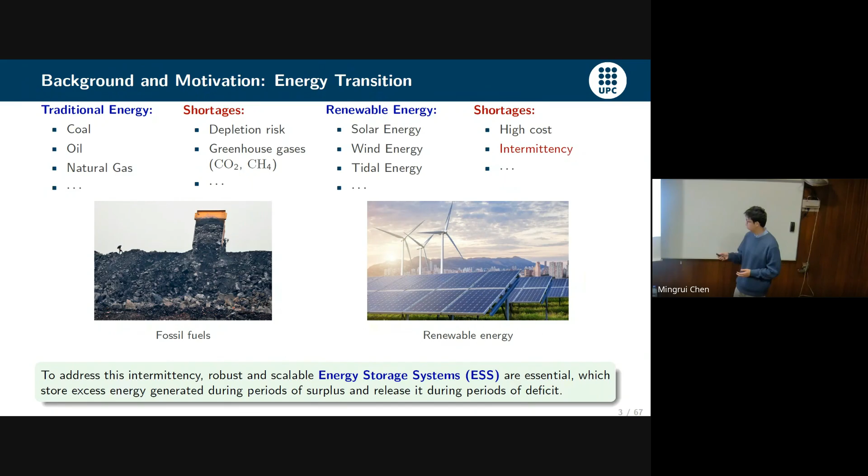Let's begin with background and motivation. The global energy is undergoing a major transition from traditional energy to renewable energy. However, one of the shortages of renewable energy is intermittency. For example, solar energy depends on sunlight, which is highly variable and cannot be controlled. To address the intermittency, we need robust and scalable energy storage systems. Among various energy storage technologies, hydrogen storage is emerging as a promising alternative due to its high energy density.

In general, hydrogen can be stored in three ways: compressed gas, liquid hydrogen, and solid state storage. Both compressed gas and liquid hydrogen have energy losses. So in my work, I mainly focus on solid state storage, which provides high hydrogen density at moderate temperature and pressure, and provides large capacity storage.

This is a schematic of a metal hydride tank, or we call it MH tank. In the charging process, the hydrogen enters the tank from the inlet and then reacts with metal alloy to form metal hydride and release heat.

To quantitatively describe the reaction, we always use the pressure-composition-temperature curve, or PCT curve. This curve is very important, showing the relationship between equilibrium pressure and hydrogen amount. The PCT curve contains two curves and three regions.

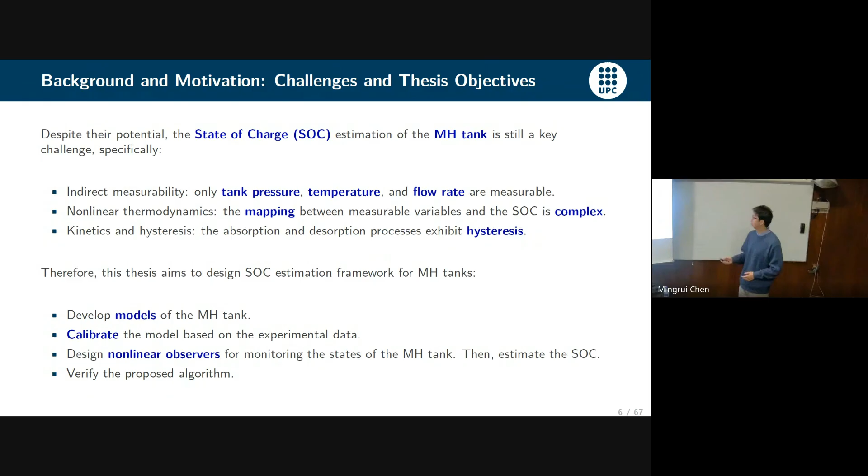This is the technical roadmap of my thesis. Part 1 mainly focuses on MH tank model and calibration. Part 2 mainly focuses on observer design and the SOC estimation framework.

Now I will introduce system modeling. Let's consider the mass transfer first. For hydrogen, the change in density can be described by this equation. Here, f in is the hydrogen mass flow rate into the tank, and fr is the hydrogen mass flow rate absorbed by metal alloy. So this part is mass changes, and this part is gas volume.

Then, by normalizing using the volume of the MH, we can get this whole mass balance equation for hydrogen. Similarly, for the MH, this part is the volume of the MH. Then we can get this mass balance equation for the MH.

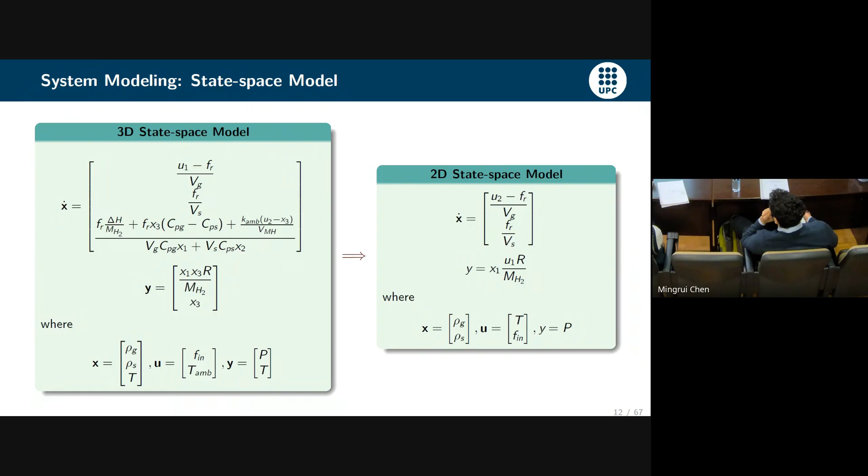To solve this mismatch, we introduce a proportional pipe model. Here, this part is pressure difference between the pipe and the tank. Kp is proportionality coefficient. And then with this additional model, we can get a modified state space model. In this model, we can see here the pipe pressure becomes the input and the mass flow rate F in becomes output.

This is the simulation of 3D state space model, and this is a charging process. This figure is discharging process, and here the first figure shows evolution of flow rate. We set a fixed flow rate, and when the pressure achieves the reference pressure, then we set a flow rate as 0.

Since the reaction can release heat, as we can see, the temperature increases gradually and achieves an equilibrium state, and then temperature decreases. Here is a figure of the SOC. As we can see in this equilibrium region, pressure almost does not change while the SOC still increases.

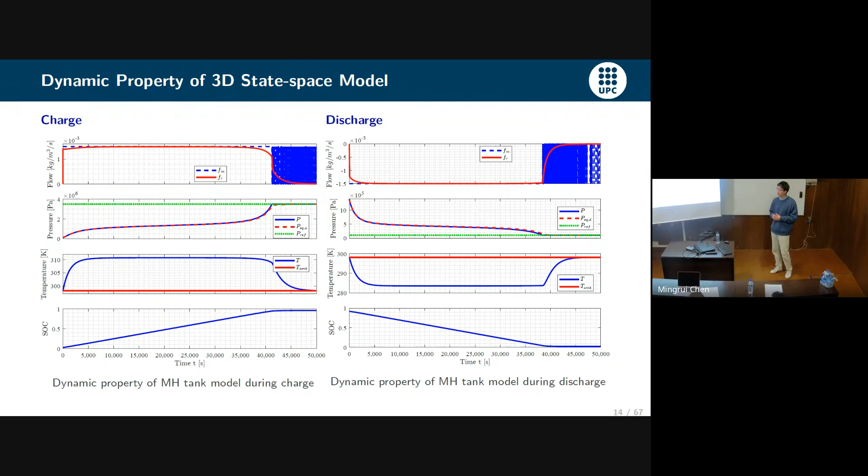Next, I will introduce the experimental setup we used. This is a diagram of experimental setup, and the main components include the MH tank, several mass flow meters, several pressure sensors, and several thermocouples.

Next, I will introduce the model identifiability and sensitivity analysis. In the MH tank models, there exist some unknown parameters. So we may ask if it is possible to uniquely determine these unknown parameters from the measured inputs and outputs. This issue is known as identifiability analysis problem. In general, we consider the following nonlinear systems. Here, theta is a constant parameter vector.

To analyze identifiability, we use a method called the correlation method. First, we can compute the output sensitivity matrix S, which stores sensitivity information of the model outputs. The main idea of the correlation method is we study the absolute correlation matrix C. In this matrix, each element is correlation between any two columns of matrix S.

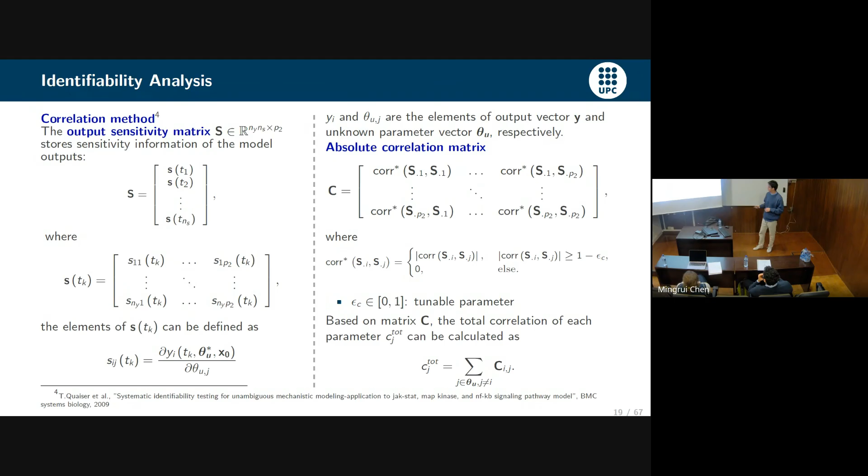After checking the identifiability, we assume that all unknown parameters can be identified. So now we may ask, can we use these values from literature directly? Therefore, it is necessary to know which parameters have significant impact on the system dynamics. This issue is known as sensitivity analysis problem. To analyze sensitivity, we use a method called first-order trajectory sensitivity analysis.

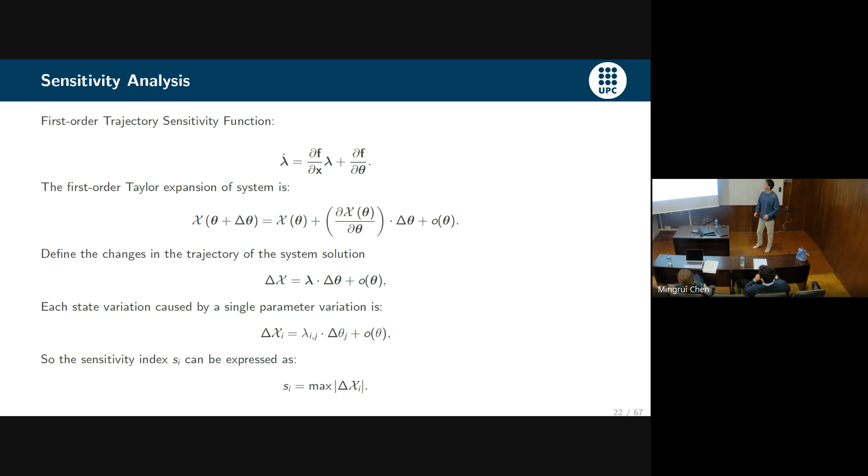The evolution of lambda for rho s in charging process is shown in this figure, and we can see here these two parameters CD and ED have no influence for rho s, because here you can see the trajectories are always 0. Then this table shows sensitivity index for each unknown parameter, and we can see from this table these five parameters have significant influence on rho s because they have a larger sensitivity index.

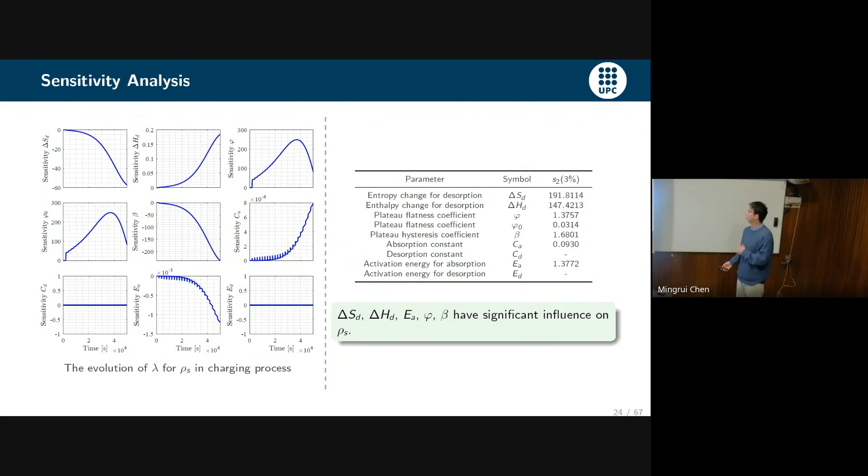Next, I will introduce model calibration. Let's consider the 2D state space model. In this model, since Fi is a non-convex function, in my work I use particle swarm optimization method because it is suitable for non-convex problems, and PSO has fast convergence speed, and it only needs some simple implementation with few parameters.

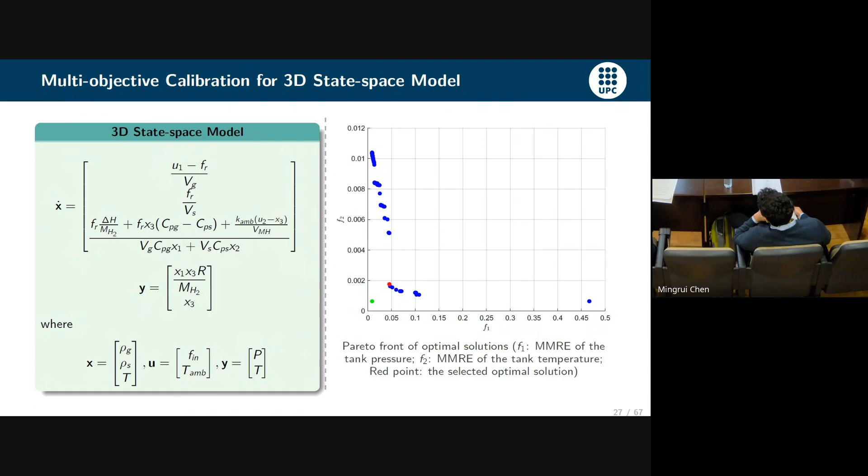Next, we can see the calibration for 3D state space model. In this model, there are 2 outputs. So if we still use the single objective optimization method, it may result in the case where one output fits very well, but another output fits very badly. Therefore, in my case, we use a multi-objective optimization method. Similarly, we build 2 objective functions. Here, this one is MMRE of the pressure, and this one is MMRE of the temperature.

Then we can plot this Pareto front based on Pareto search algorithm. I want to emphasize that each point on this Pareto front is a trade-off. It's a trade-off between the pressure accuracy and the temperature accuracy. So now the problem is, how can we choose a best one from these points?

To solve this problem, in my case, I calculate the normalized Euclidean distance between any point and the ideal point, and then we choose the point with smallest Euclidean distance. Here in this figure, the green one is the ideal point, and the red one is the point we selected.

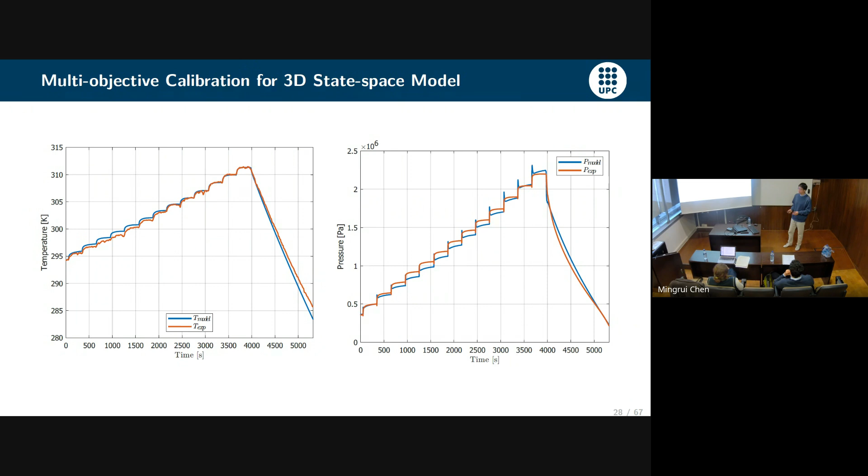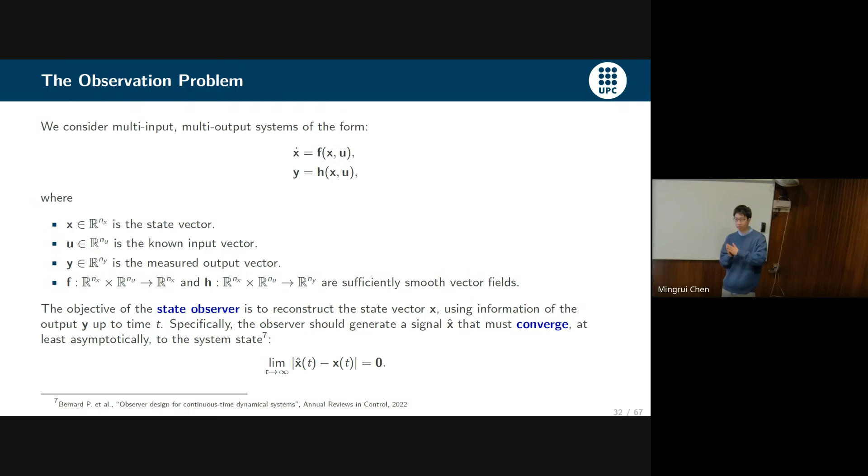In general, we consider the following multi-input, multi-output system, and the objective of the state observer is to generate a signal X hat that converges to the true system trajectories asymptotically. Before designing the observer, a key point is to analyze the observability of the model. That is, it is necessary to analyze if it is possible to reconstruct the state variable X from the measured variables and the model output.

Instantaneous observability can be tested through the Jacobian matrix rank of the observability map. Here, the observability map consists of system outputs and its derivatives. If the Jacobian matrix of this observability map is full rank, then we say that the system is locally instantaneously observable.

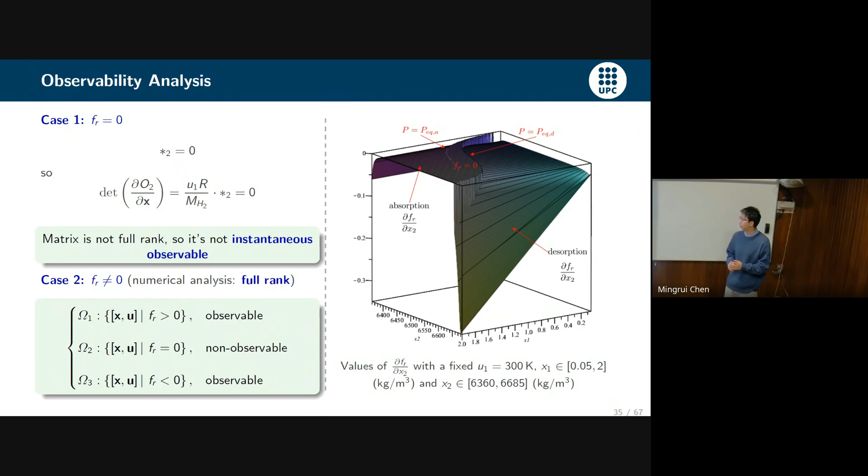Although we have this conclusion, we still don't know when the system enters the observable region, because as we discussed before, Fr is unknown and cannot be measured. So we need to find a way to estimate Fr. To solve this problem, we use the following subsystem, and it's very easy to design the following differentiator for this system. However, this differentiator is very sensitive to measurement noise, because here we use the derivative directly.

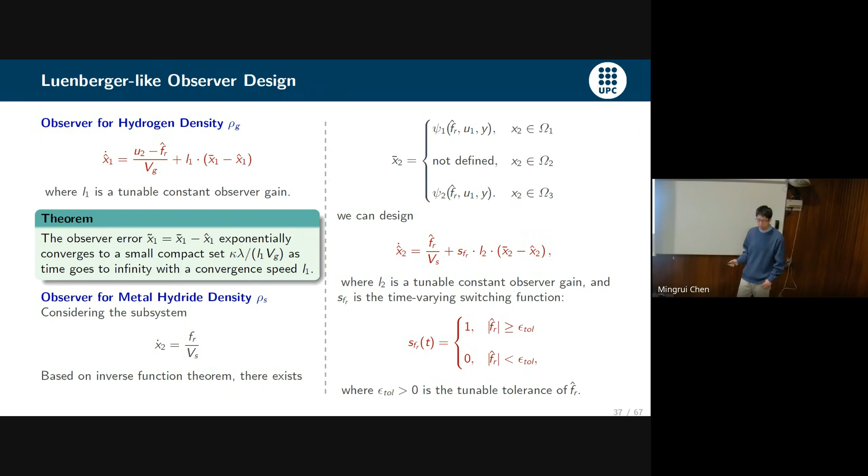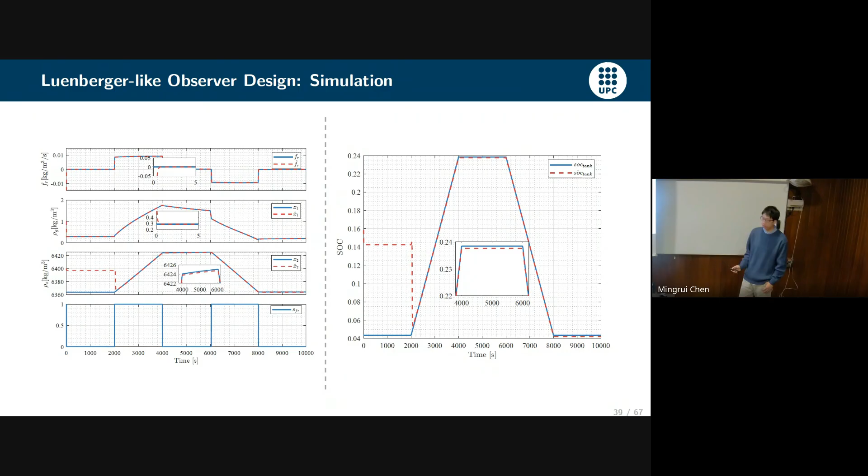Next, I will introduce the SOC estimation with differential detectability based observer.

Let's consider this 2D state space model. So far, we already designed a Luenberger-like observer for this model. However, the above observer requires inversion of the expression for FR, and it requires substantial offline data for training. So we may ask, do we have a better method?

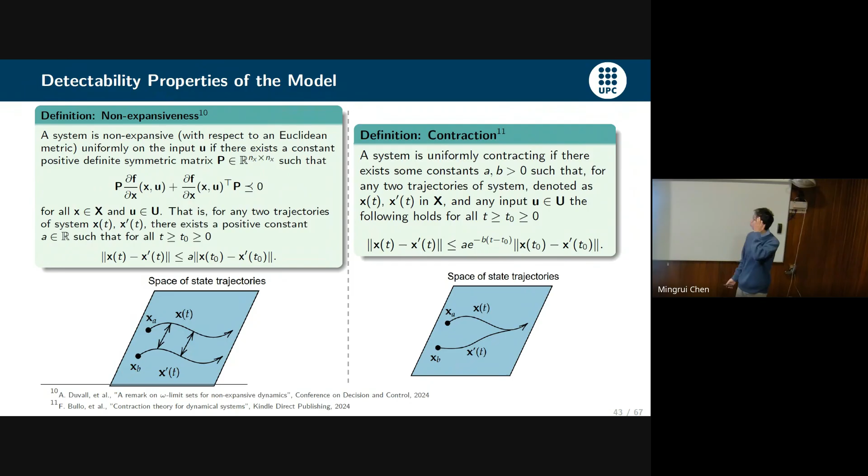Since the output of the original system is not linear, in my work we introduce the following transformation that linearizes the output. Then the original model can be rewritten as the following switching system. Here sigma is the switching signal, which corresponds to the following three cases.

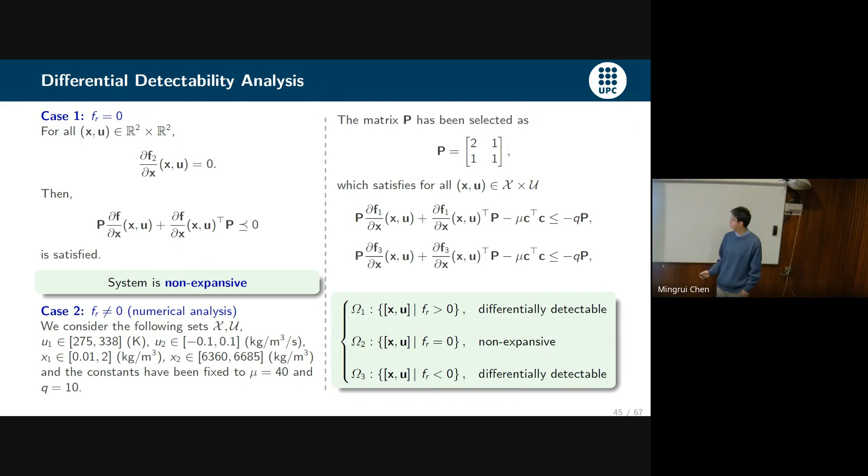Similarly, before designing the observer, we should analyze differential detectability. For the case where Fr is 0, we can see this equation is satisfied. Then we can see this inequality is satisfied based on the definition of non-expansiveness, so the system is non-expansive in this case. For the case where FR is non-zero, we use a numerical analysis. That is, we can choose appropriate constants mu and q, then we design matrix P to make the following inequalities satisfied. In summary, the system is non-expansive if Fr is 0, and the system is differentially detectable when Fr is not 0.

So now, based on the property of differential detectability, we can design the following switching observer, and the observer dynamics are switched based on the signal sigma. For this switching observer, we have this lemma, which means that if the system and the observer stay in the same observable regions, the distance between x hat t and xt decreases exponentially. If the system and the observer stay in the non-observable region, the distance between x hat t and xt would not increase.

This is the switching mechanism, and here the observer dynamics are switched based on the estimation of Fr, and this value is from the USD we designed before. Finally, we have this theorem, which means that if the system stays in observable regions for a sufficiently long time, the switched observer is uniformly contracting, and the observer error decreases exponentially.

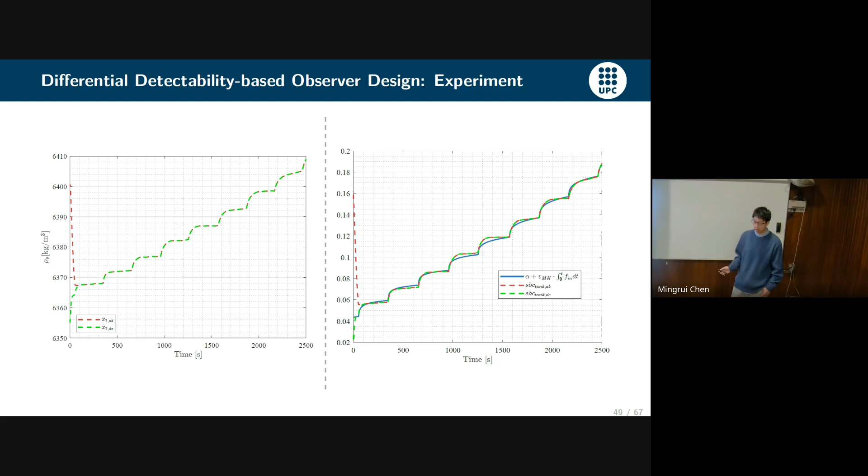Next, I will introduce SOC estimation with a high gain switched observer. So far, we already have two observers. However, the above two observers have a significant non-observable region. That is, when Fr is 0, the system is non-observable. So we may ask, how can we reduce this region? To solve this problem, we have to consider the complex 3D state space model. Similarly, we should analyze the observability of the 3D model, and we consider the third order observability map for the 3D state space model.

For the case where Fr is 0, we get this Jacobian matrix, and we get these four very complex expressions. Fortunately, after analyzing, only when the tank temperature X3 is equal to the ambient temperature is the rank of this matrix not full. Then the system is not observable in this case.

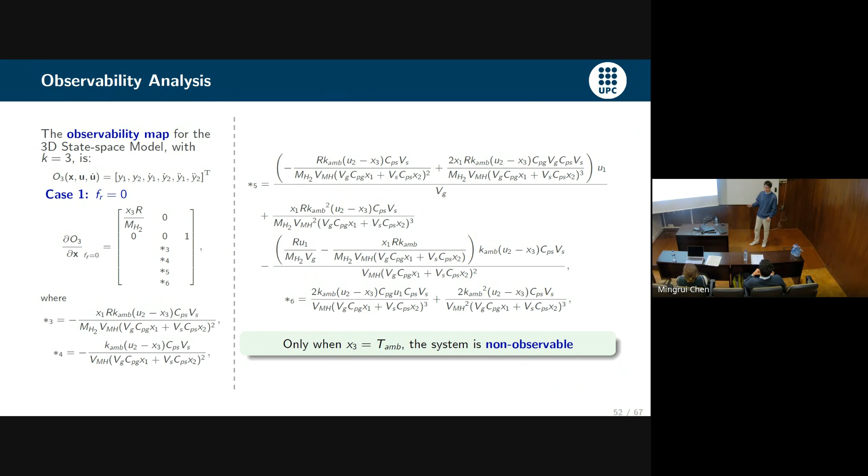For the case where Fr is not 0, we consider the following submatrix of the Jacobian matrix. Fortunately, in the above slide, we already analyzed the rank of this matrix. That is, the system is observable when Fr is not 0. Therefore, we have this conclusion: only when Fr is 0 and tank temperature X3 is equal to the ambient temperature is the system non-observable. In other cases, the system is observable.

The original H-tank model can be rewritten as follows: an input-affine nonlinear switched system. Here, sigma is a switching signal corresponding to the following four cases. We assume that there exists a function defined as the system output and its derivative. Then we can transform the original system to a new coordinate. That is, the system dynamics in eta coordinate can be rewritten in the following triangular form.

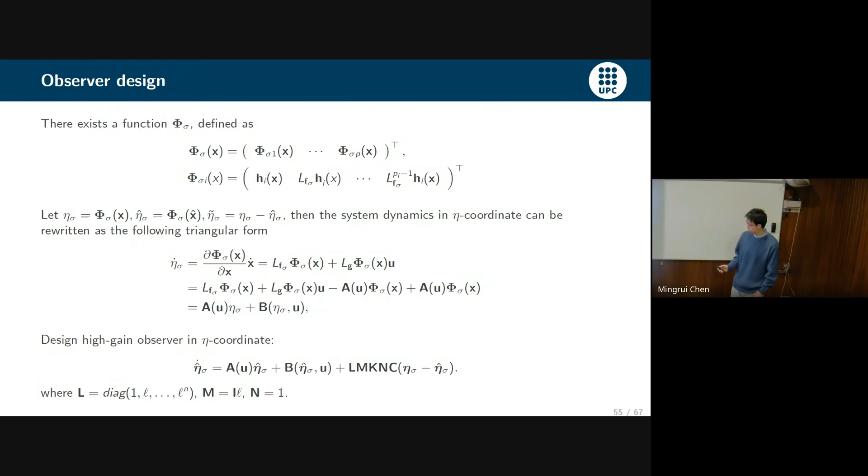For this triangular form, we can design a high-gain observer in eta coordinate. And if we go back to the original x coordinate, we can design this switching observer. Similarly, we have this additional term SFR. When the system is in the observable region, SFR is 1, and when the system is in the non-observable region, SFR is 0. And SFR is switched based on the estimation of FR and the estimation of temperature, X3 hat.

The main idea of the observer is that first we transform the system into a new coordinate, eta coordinate, by using this diffeomorphism, and then in this eta coordinate, the system is in triangular form. So we can design a high-gain observer for this triangular form, and then we go back to the original coordinate by using the inverse of this diffeomorphism. This is the switching mechanism we designed. Here the observer dynamics are switched based on the estimation of FR and estimation of temperature X3 hat.

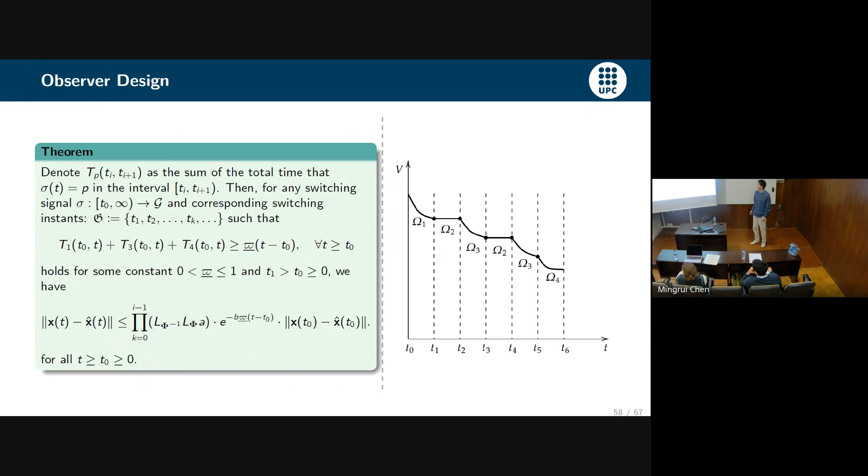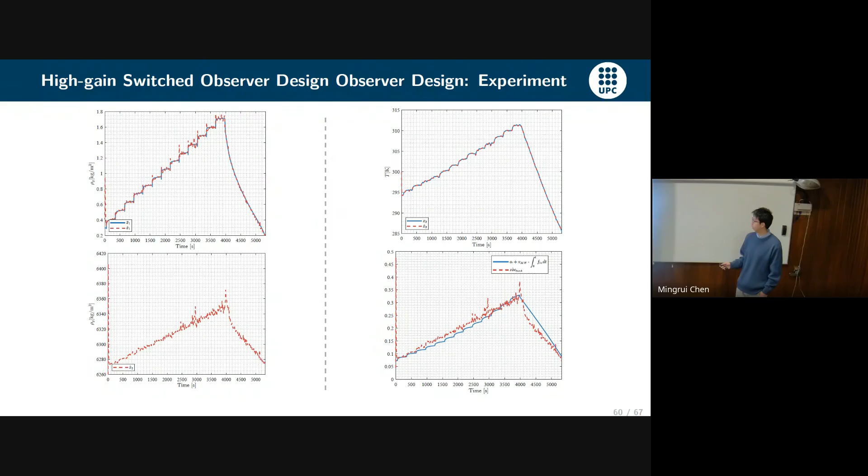These four figures show the experimental results, and this one is the estimation of SOC. We can see the estimation result is more or less good. Next, I will give a conclusion and propose some problems that can be solved in future.

The main contributions of my thesis can be divided into 3 parts. The first is about the H-tank model. I developed physical and state space models. Then I analyzed system behavior in charging, discharging, and mixing conditions. The second is about parameter analysis and calibration. I analyzed the identifiability and the sensitivity of the H-tank, and then based on these results, I calibrated the H-tank model using PSO-based single-objective and multi-objective optimization methods.

The third is about the SOC estimation framework. I designed a USD to estimate the absorption rate FR. Then I designed three observers for monitoring the states of the H-tank, and then based on the observer results, estimated the SOC.

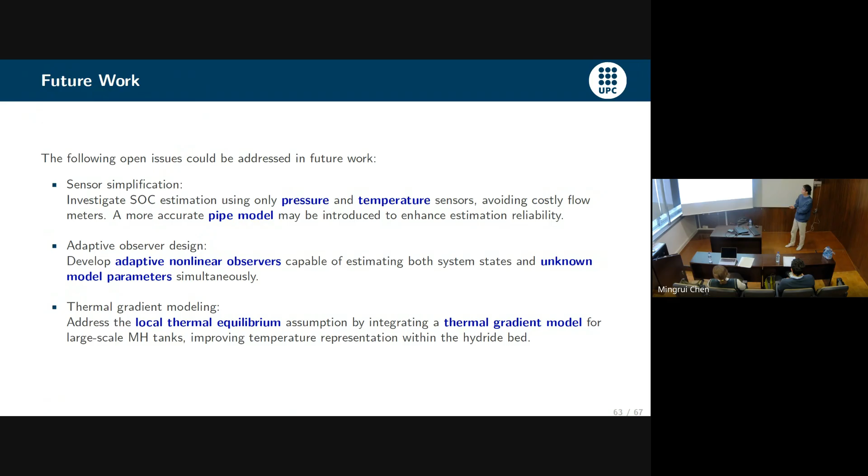The following open issues could be addressed in future work. It is interesting to investigate SOC estimation using only pressure and temperature sensors because the mass flow rate sensor is very expensive. It is interesting to develop adaptive nonlinear observers because in the state space model of the H-tank there exist unknown model parameters. It is interesting to address the local thermal equilibrium assumption by integrating a thermal gradient model for large-scale MH tanks.

In my PhD study, I published 4 journal papers and 4 conference papers, listed here.

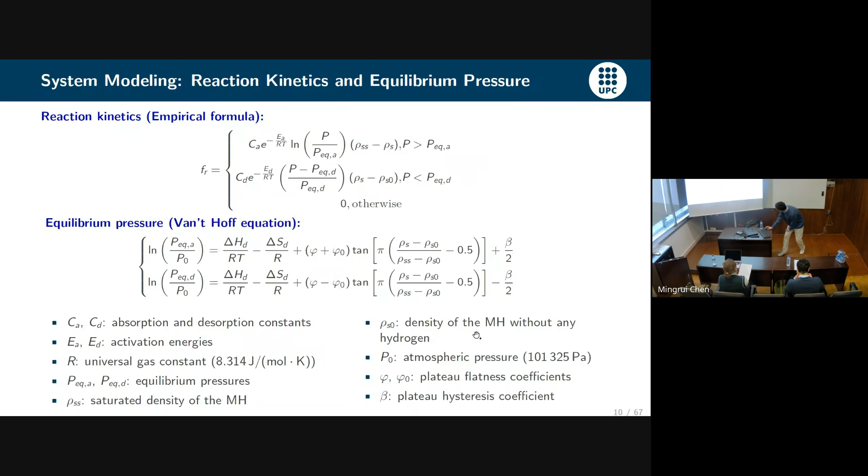In our case, because the gas and the MH satisfy local thermal equilibrium, this is satisfied, so we don't consider this part.

And this one is, I mean, because the gas is absorbed by metal hydride, so when the hydrogen gas enters the MH, we only need to consider the temperature of the solid. This is the change of molecular energy between the gas and the solid.

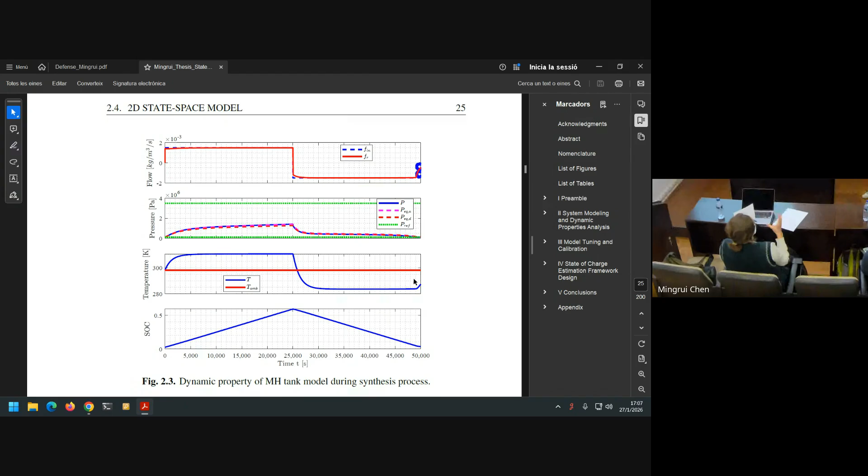And you say that the heat exchange with the exterior part is neglected. I don't agree, or in any case you don't consider it, but you don't assume that this heat exchange is zero. I understand. I agree with you.

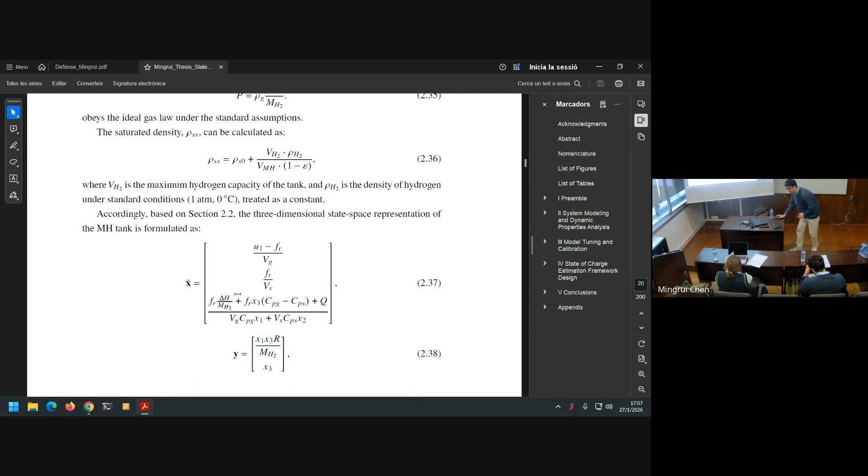I mean, here the 2D state-space model, because the temperature can be measured by thermocouples, if I can show you the 2D model. This is a 3D model, and this part is temperature, because this part can be measured by thermocouples, so we can think the temperature is known. So we can simplify this state-space model to a 2D model.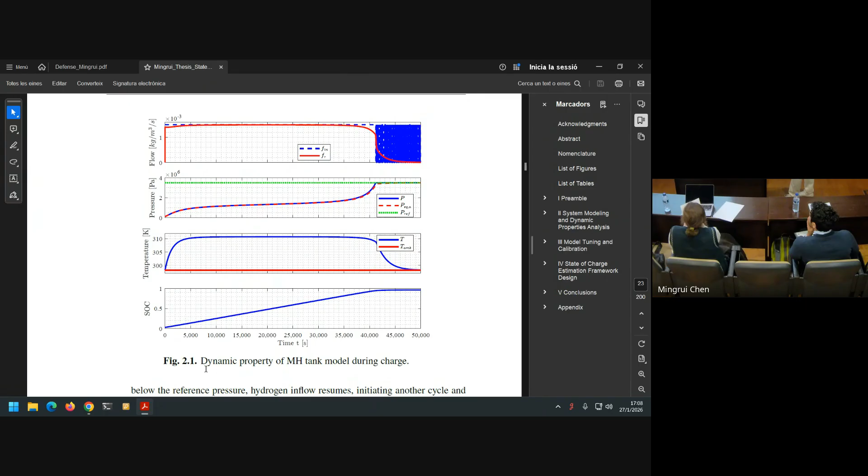But in figure 2.5, I think that figure 2.5 is from the 2D model. From 2.5? Okay, yes, this is a figure from the 2D model.

But then the temperature here, because you don't have any real system. So how have you created the curve here in temperature?

Actually, this temperature is real data, because our temperature is from thermocouples. We put thermocouples outside of the tank, so this is experimental data we collected. I didn't understand this - this temperature is not from an expression of temperature, it's very complex.

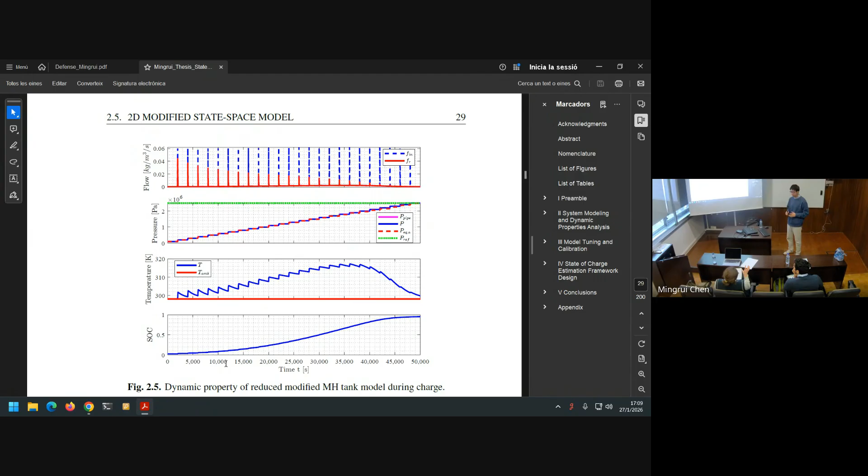Trend. Okay, then I think that you have assumed in your thesis that you don't put any refrigeration or anything to control the temperature in the metal hydride system.

And this maybe could change your results a little bit, do you think, or not? Because I think that normally in metal hydrides, when they charge or discharge, it is interesting to maintain the temperature quite constant in order to charge and discharge faster. Is this right? Yeah, it's right. I agree with you.

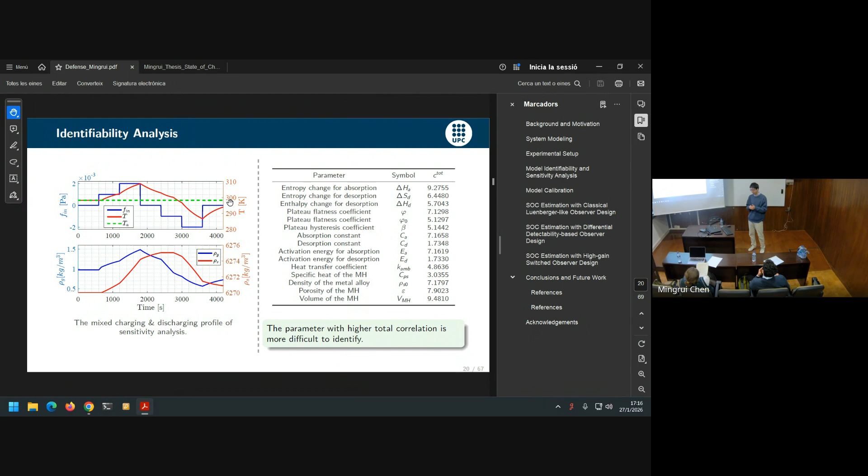So in the 2D model we don't analyze identifiability separately, because the unknown parameters in the 2D model also influence system outputs in different ways.

But if you have one less output, can you still identify all the parameters? Yeah, because in the 3D model we have 2 outputs, and we can identify all unknown parameters based on these 2 outputs.

And if we don't consider this part, if we don't consider the temperature, this output pressure, in this part the unknown parameters influence the system output P in different ways. So in this simplified model, the unknown parameters in this part influence pressure differently, so we can identify the unknown parameters from this pressure. That's what I think.

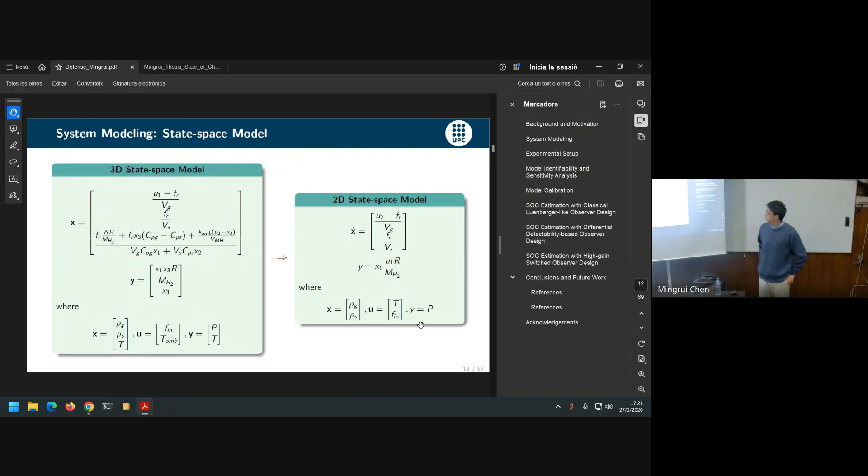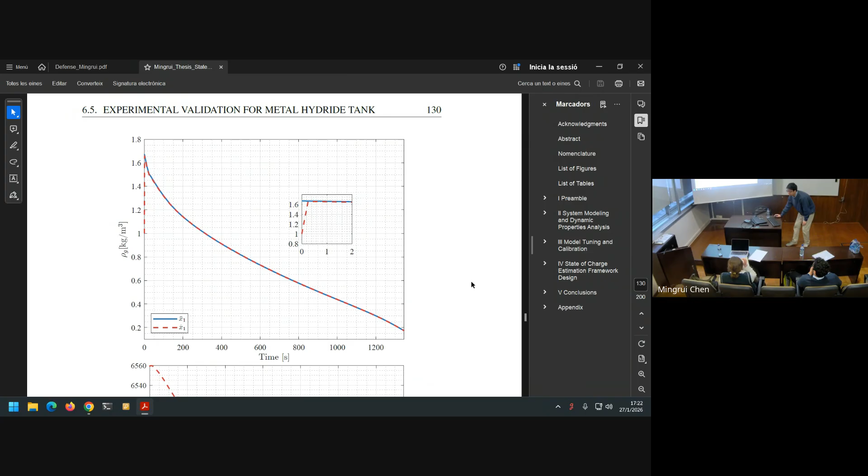Yes, for instance, on page 131 of the thesis, or maybe 130, this one below. Here, the estimation of the state of charge is much slower than in the other examples.

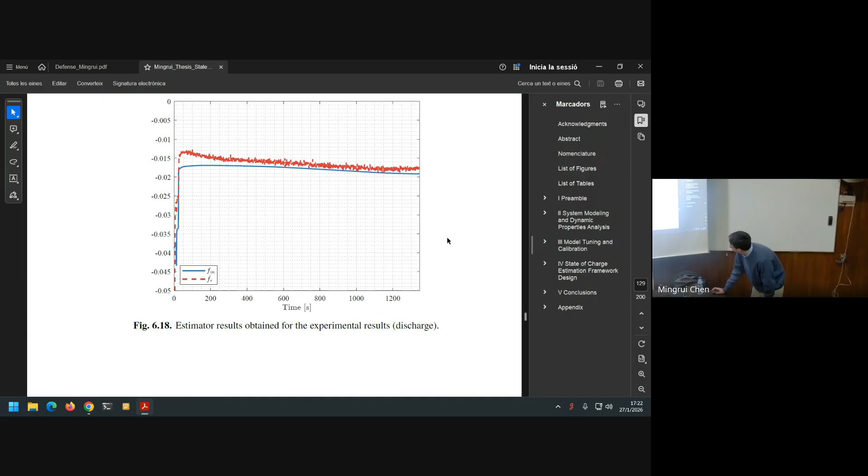You needed more time. This is real validation, experimental validation. One question is if you know why, and the other one is if you have done it, because in the simulations it didn't seem that this had to be so slow, but this is simulation. So, do you know why in the experimental validation you need this amount of time for the reduction of the error?

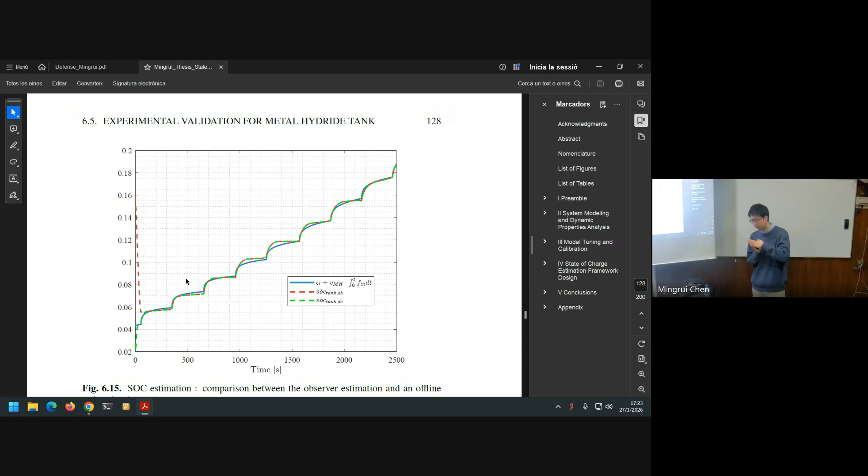Actually, I think because in this chapter I designed the observer based on differential detectability, the problem is this property is a global property, and what we can guarantee is that the observer converges to the true system states asymptotically, but we cannot control the convergence speed.

So in the simulation, although it's very fast, also it's very fast, but in experimental data we cannot control the convergence speed.

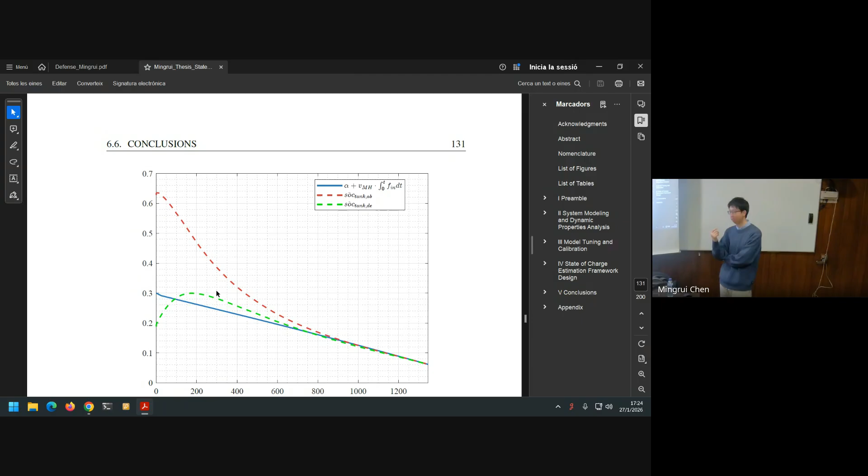But you don't know the reason why this difference between simulation and reality happens? I think maybe the reason is, as I said, because we cannot control the convergence speed, and it's already the best solution.

Okay, only two more questions about the experimental work. Have you participated in the experiments, in the acquisition of the data, and even in the design of the experiments? Yeah, actually, I want to explain this out.

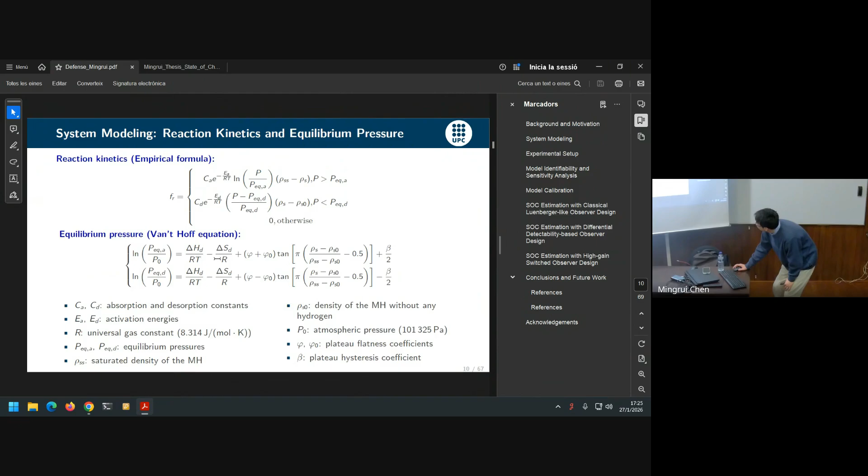But the problem is in many laboratories, what they control is fluid. So I collaborated with Brian, and we designed this setup, and in the final version of the setup, we can control both pipe pressure and flow rate.

And for the experiment, I collected the experimental data with Brian, and we did charging and discharging experiments, and we collected the data and analyzed the results. Yeah, thank you. Okay, thank you.

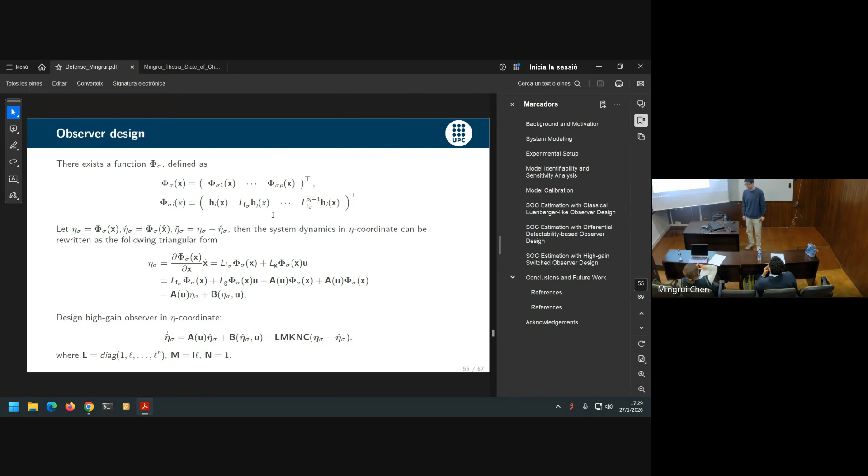Here in this chapter, I design a high-gain observer. This high-gain observer is for the system with the following triangular form. So if we want to use this high-gain observer for another system, we should first transform the system into this triangular form, then we can design a high-gain observer for it, and transform back to the original coordinates. Okay, thank you very much.

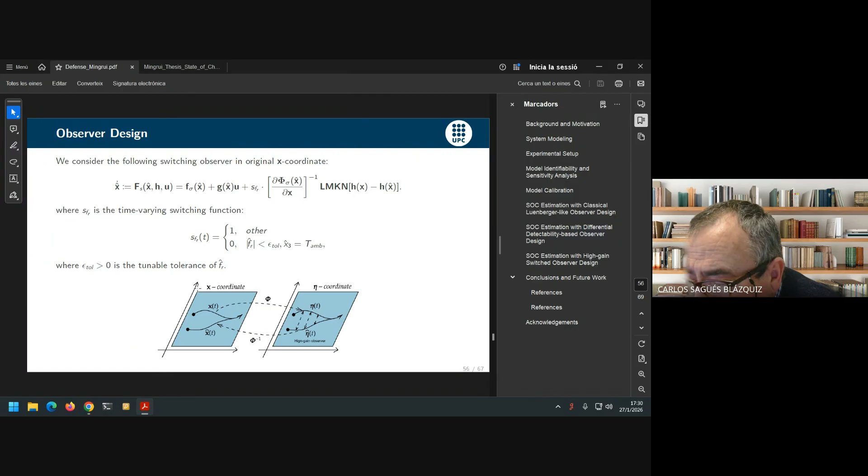Thank you very much for the presentation, for the thesis. It was very, very nice reading it. Especially, I really appreciated the fact that coming from more of a theoretical side, I see someone who actually applies control and observation in real life. It's very, very nice to see.

So I have some questions, first related a little bit to the identification and calibration part, and then a little bit more to the observer part. My first question is related to the identifiability sensitivity analysis that you do, because from the method that you use, from my understanding, you basically collect some samples of the output.

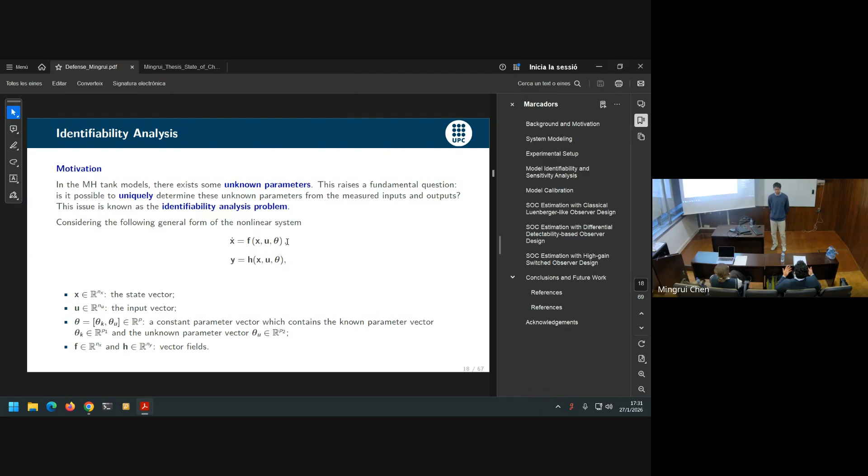Yes, to get the sensitivity matrix and the correlation. So my question is, I guess this output is generated by some inputs that you inject into the system. How did you choose this input so that you have a matrix that actually represents the good behavior of your system? Do you have some persistence of excitation type properties of your input to be sure that what you get is actually representative? If I understand, you're asking how to choose the input, to get good samples for your computation of the sensitivity matrix. Yes.

I think what we can choose is the sampling time of the output. We should choose a bigger sampling time of the output, because if the sampling time is too small, the rows of this matrix will have a very strong correlation. So first, choose the bigger sampling time, and for the output, because this identifiability is for a 3D model, we have two outputs. In our case, we choose those outputs, and then we calculate this partial derivative for all the unknown parameters, because in the MH tank model we know which parameters are unknown, so we analyze all the output for other cases.

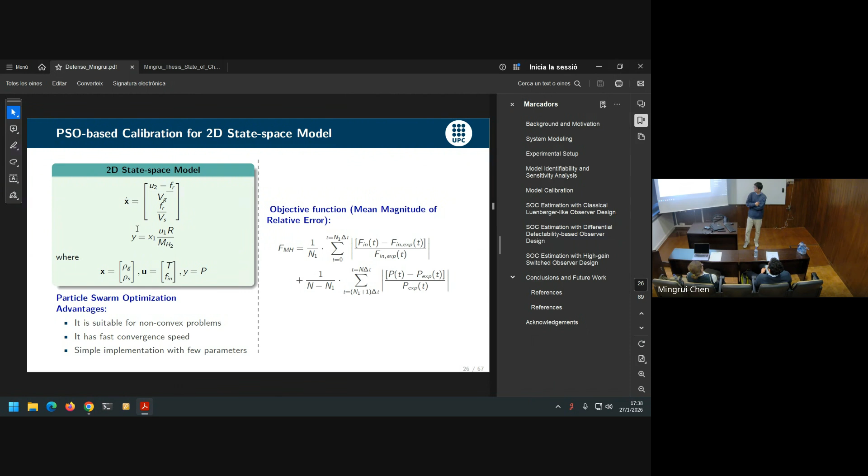Actually, I think PSO can extend to other models, but in our case, we only use PSO for the specific MH tank calibration problem. But in research in general, the MH tank models are always 2 or 3 dimensional models, and for higher dimensional models, PSO can be used, but it may need longer computation time.

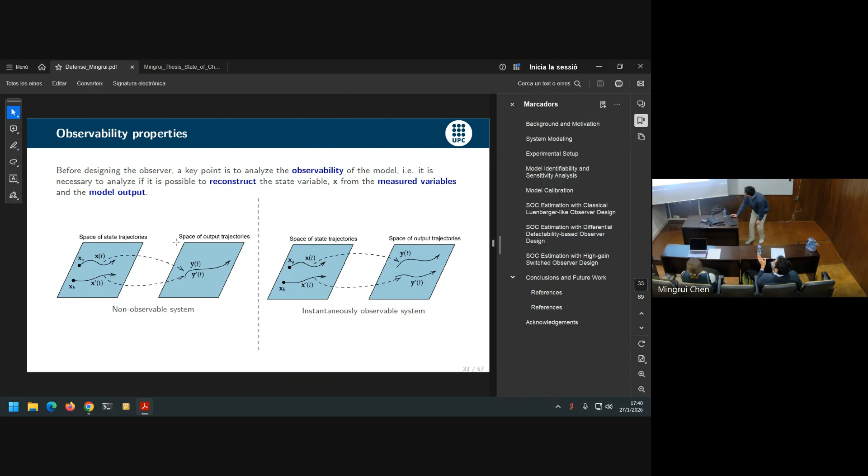Thank you. Okay, the last question on this part, and then I move to the observers. You show some plots of curve fitting for your trained model to the data. So the plots that you show are just one curve. I wonder if you did some statistical analysis of the validity of your models. Did you try many runs and see if your model was fitting well over the whole test set?

Like, do you have a train set on which you trained, and then a test set, and you check if your model derived from the train set also generalizes to the test set or not? I'm not clear. It's still the modeling problem. So you obtain some parameters from some data, and then you test your model and check how well it fits in new experiments, right? Yes.

Did you try, just out of curiosity, to see how well your model generalizes to different initial conditions or inputs? Because what you show is simply one graph. Maybe it would have been nice to see some average plots, some standard deviation of the errors. Yes. Actually, you mean the sensitivity analysis and identifiability analysis is local. Yeah, it's local.

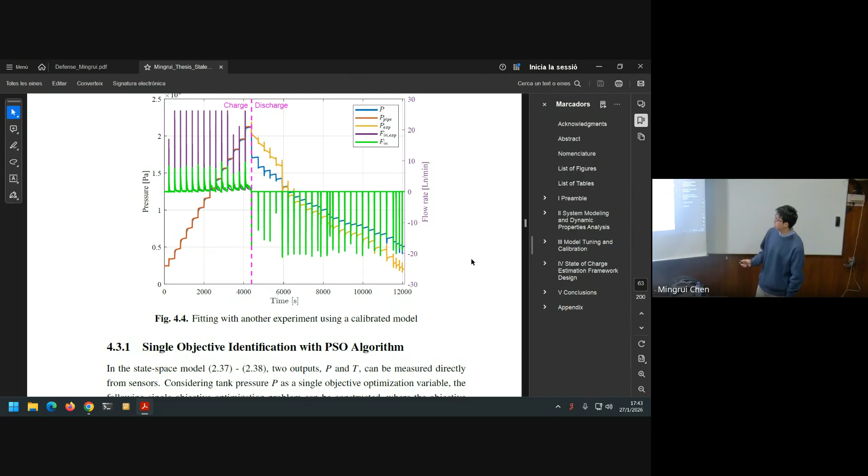Maybe I lost them. Here. This is where we use different experimental data, and here is the calibration results for FR, and this is for pressure. It's not very good, but generally it can generate. Thanks a lot. Okay, you can move to the observers.

So I would like to start from the Luenberger type. Okay. So, looking if I can find the page, slide 36, actually the one before. So yeah, okay. First, I would like to understand a little bit better why you use the USDE for U2. For U2, because isn't it measurable? It's an input, right? Yeah, U2 is measurable.

So we can impose a low pass filter on the U2 signal. But do you need the derivative of U2? No, we don't use the derivative. In this version, U2F is the low pass filtered version of U2. My question is, why can't you just use U2 directly in your computation of FR? Why can't you just use U2 instead of the filtered one?

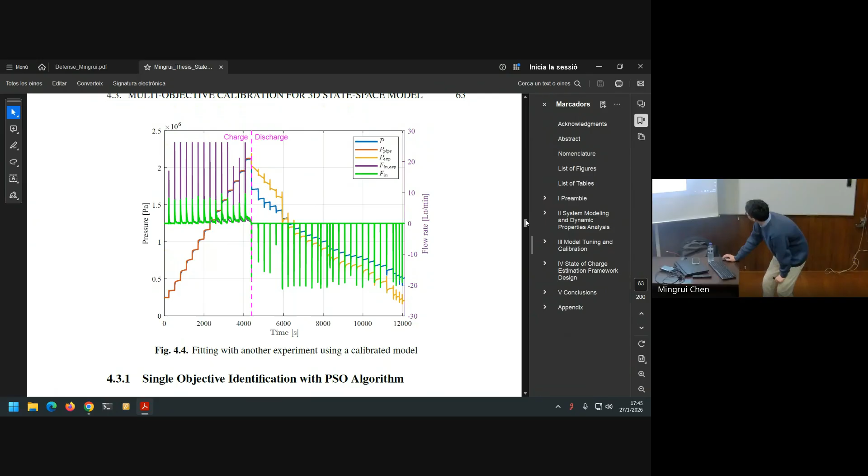Because we only consider these sub-matrices, and here we only have U2. Okay, I want to show you. Yeah, this is a 2D model, and if we want to estimate FR, we can only use this one. We need to consider this. And so for this subsystem, we impose a low pass filter on U2 and

X1. Then we can design this manifold variable, and when kappa goes to 0, t goes to infinity, this is satisfied. So this equals 0, and then if we move this part to the right side, we get this. This I agree. But my question is, why can't you use U2 directly in the manifold variable instead of U2F? Maybe I'm missing something.

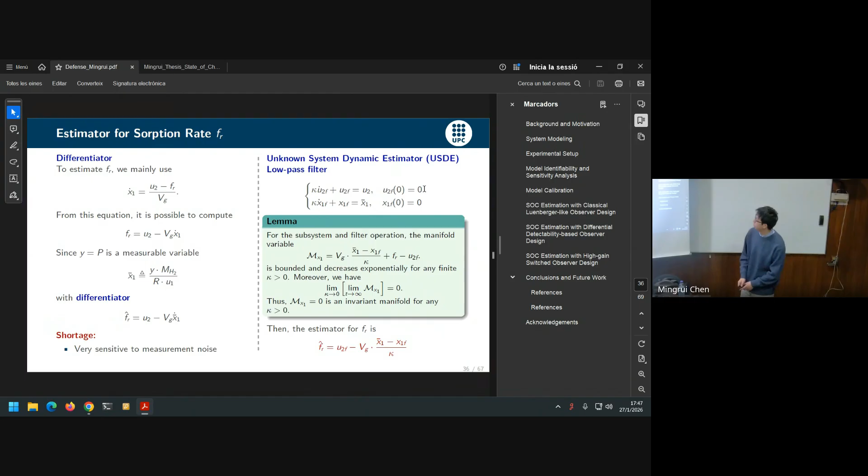Sorry. You see, in M, the manifold variable, you have U2F. Why can't you use U2 instead of U2F? Why do we need the filtered variable there? Because compared with U2, the filtered version U2F is smoother, and it can deal with sensitivity to measurement noise. The measurement of U2 is very noisy. U2 is the mass flow rate f_in, and we measure it with a mass flow meter. So in experiment, it truly has measurement noise.

Okay. And then related to the lemma, I'm not sure I agree on the last sentence. Sure, you can prove that if k goes to 0, then the manifold variable goes to 0. But how does this prove that the set where m is equal to 0 is invariant for k positive? I want to show you. Because I read the proof and I agree almost up to the last line, and the last line I don't understand.

Here, this is one of m and so on, and if kappa goes to 0, this value is bounded by kappa lambda. I agree. It's bounded by kappa lambda. So when kappa goes to 0, this is bounded by 0. But it must be positive, so this is satisfied. It cannot be negative. Yeah, sure.

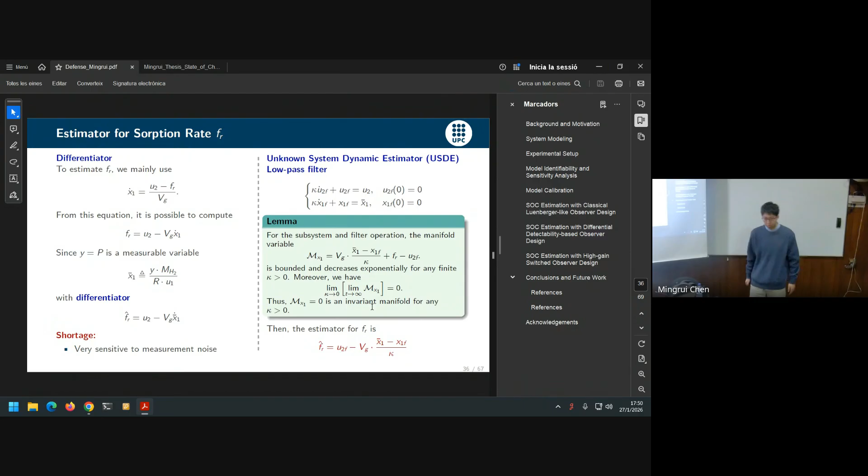It's small enough. Yeah. So when kappa goes to 0, I think that this limitation is... So your statement is I stay sufficiently close to 0. Yeah. Okay. And actually, the condition that this equation is satisfied is that we design a small enough kappa, then this is satisfied. And how do you choose the kappa small enough? Because I guess that if you choose kappa small enough, you increase the sensitivity to noise.

The filtered signal and the true signal have a phase delay, and to reduce the phase delay between the filtered version and the true system, we should decrease the filter parameter kappa. However, a small kappa is very sensitive to the measurement noise. So we should choose kappa based on the experimental data we calculated. Actually, it's a trade-off between robustness and phase. Okay. So you select it through experiments. You do some experiments with different kappas and you select the one that you prefer. Yes. Okay. Thanks.

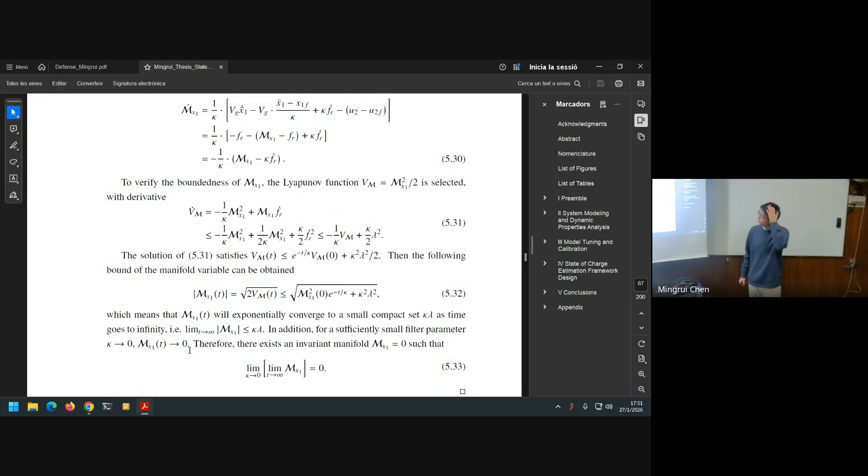So can you go to slide 40? Slide 40. This one? Is it 40? Oh, no, maybe 41. Sorry. Next one? No, 42, sorry. Go to the beginning of the contraction based. Next one. Yes, okay. So here you say that the Luenberger observer requires substantial offline data for training. Yeah. Where do you have to train the observer? Here, around the Luenberger. Here, okay.

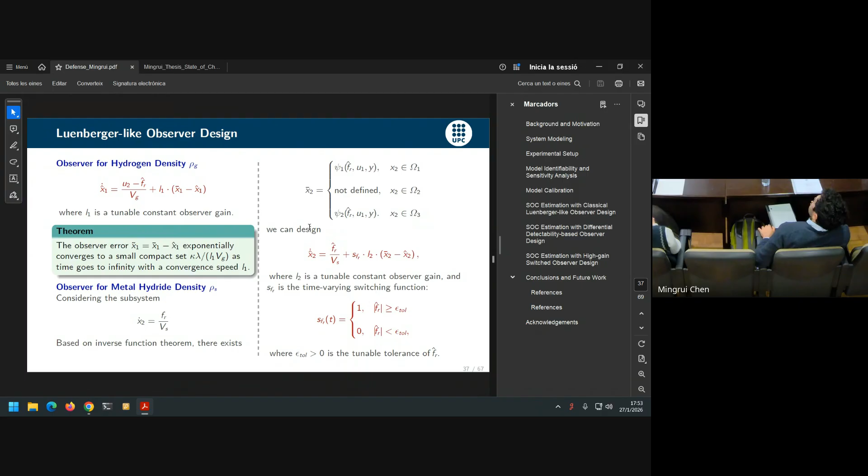In this Luenberger observer, we use X bar, and actually in this part we can calibrate the data in the simulation with different X2, u1 and y, and we get the data of fr. We can train the neural network to do inference to calculate this. This is actually a neural network we train. Okay. So here we train two neural networks. Okay. So it's basically an open loop prediction. Yeah. This neural network is trained offline. Like when you deploy it online, X2 is estimated in open loop. There's no feedback. Yes. This X2 bar is open.

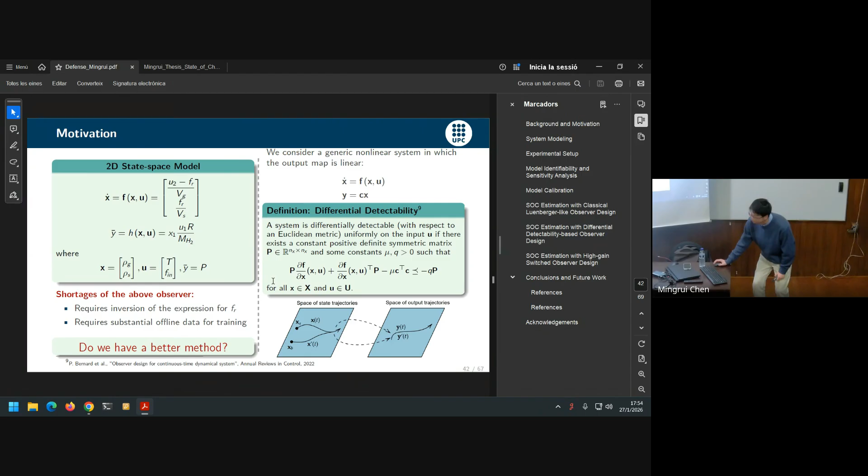And do you think there could be more robust methods to estimate X2 than this one? Yeah, so that's why we designed this differential detectability based one. The idea of the differential detectability based one is to remove the dependence on the neural network. In this differential detectability based observer, we needn't train the neural network based on the experimental data. Okay. Yeah. Thanks. Thank you.

Sorry, I don't know how much time I have. I try to be fast and reduce my questions. Don't worry. You can ask as much as you want. Okay. But also for him, I guess.

So there's a point. I really like this part on differential detectability because it's more in control. I have a question about what you say in your thesis. I don't remember exactly the point. But you say that differential detectability is less stringent than local instantaneous observability. Yes. Now, my question is, I have an idea, but I want to know what you think: is this still true whenever you define differential detectability with a constant metric? So when you have a Euclidean metric. Yes. Because here you're asking something a little stronger than classical differential detectability. Here you're asking the condition to be verified with a constant P.

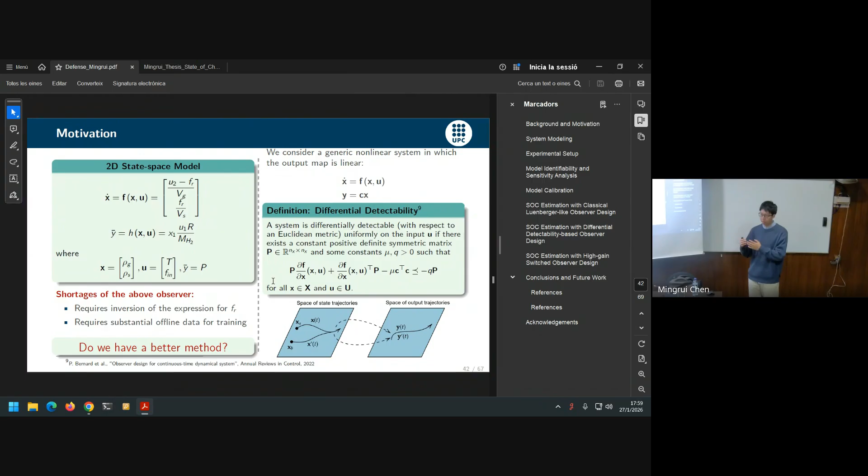In this case, it's a non-observable system. So if we want to design an observer based on the observability property, we cannot design the observer. But if we use this property, we can design the observer. Okay, thanks.

Okay, I also have a couple of questions, and then just some general ones. I really like the fact that you study the switching problem, the desynchronization in switching. However, when you have switching systems, there may be some issues of having, I don't know if you can call it Zeno behavior, where you have basically infinitely many switches in a finite amount of time.

So my question is, and I do not have an answer for this, I would like to know what you think about it. Do you think it's possible for a system to satisfy your condition that you have over there, but have many fast switches in between the observable and non-observable mode? Why do I say this?

Because if this is possible, and in the non-observable region you don't have a perfect non-expansion, you may have an overshoot. And if I switch too much at the wrong times, I could diverge, ideally. Yeah, actually, it truly exists.

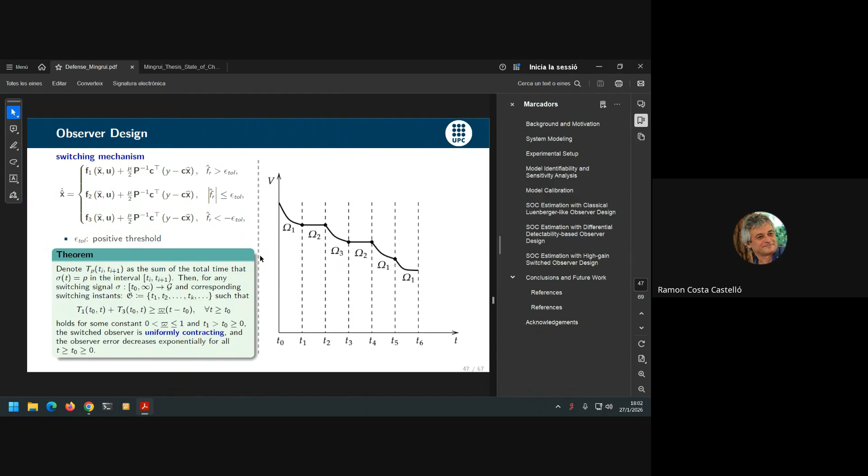the observer dynamics are switched based on the estimation of FR, and for the estimation of FR, you cannot guarantee this estimation is very close to the true FR. So when the observer switches, when the system switches, the desynchronization is still a problem we need to deal with. Thank you very much.

So the last question is on the observer, the high gain one. I found the assumptions you need for the application of this approach pretty complicated, the one coming from the paper from Bernard and Associates. So how verifiable is this assumption? Did you compute yourself the diffeomorphism that changes you into the triangular form? And is it easy to find in this framework?

You mean this? Yes. Actually, because this is the observer for the 3D model, and it only has 2 outputs, I think it's very easy to build this. In my simulation and experimental part, I wrote this, but in my thesis, I don't write the accurate form. So you found the function phi that transforms you into triangular form. Yes. And do you think this is generalizable to other models?

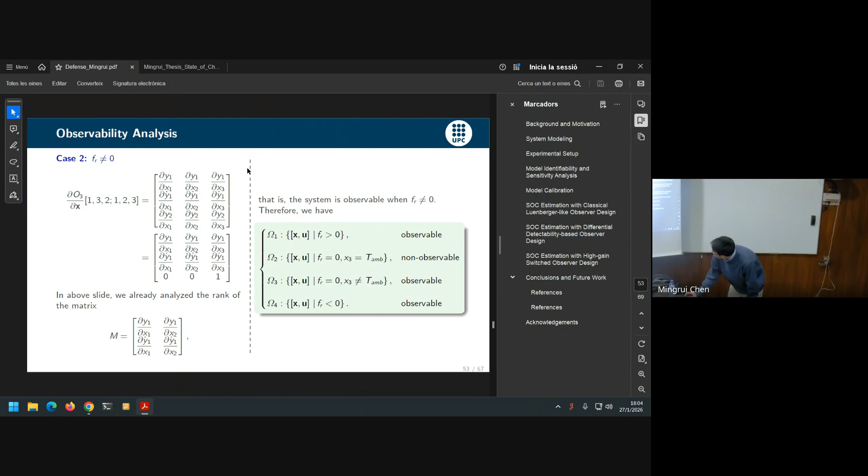I think so, because this method is for input affine nonlinear systems. So if you can write the system model in this form, then you can transform the system to triangular form and design the observer. Okay. Thank you very much. Thank you.

Okay, just a general question then. Between the 3 observers that you proposed, which one do you think would be the better fit for practical application, to bring out into the industry? What are the advantages and disadvantages of each, and which one would you pick?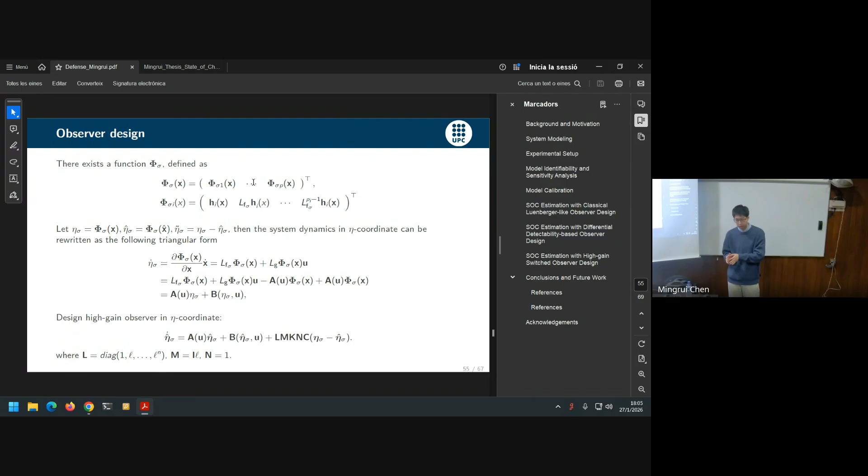Actually, the 2D model is suitable for the case where the heat transfer between the tank and the external environment is not considered. However, the limitation of the 2D model is the large non-observable region. So these two observers have a large non-observable region, and in this observer we use the 3D state space model, and we remove it.

In this observer, the non-observable condition is very difficult to satisfy. So if you want to make the observer converge fast, you can choose this one. But this observer contains a temperature expression. It's more complex than these two observers. And for this observer, because we use the contraction property, we cannot control the convergence speed.

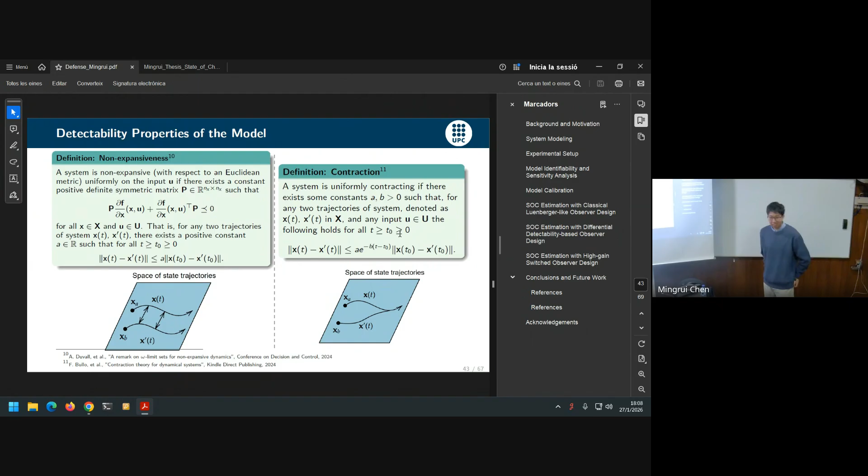Okay, thank you very much, Samuel, for your questions. Yep. It's my turn. I would like to congratulate Mingrui. I think you have done a huge work, going from modeling to the problems of identifiability, and finally finishing in observers, and it's a huge work. This is nice, very nice. Also, it's nice because you are trying to solve a real problem, using fundamentals of physics, chemistry, and control theory. And I think this is the way to advance.

So you have proposed complicated models, complicated but useful models, to develop these models for observers. This is very nice, and also it's very nice that the problem is motivated by a real application. So I congratulate you and also your supervisors, Gina and Ramon Costa. I have some questions that are quite general, but I would like to emphasize.

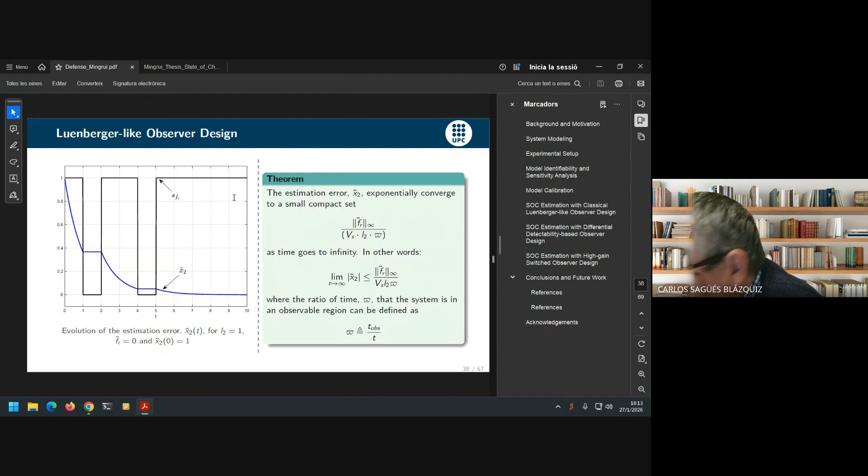I have a question which is related with the models, about the parameters, the values of which appear in the tables that you have, for example, in tables 2.1, 3.5, and 4.3. There are several, but we are going to fix one. The specific heat of metal hydride in table 2.1 appears to be 700. If you go to table 3.5, it appears to be 400. And if you go to table 4.3, it appears to be 5,400. So the values of the same parameter appear to vary.

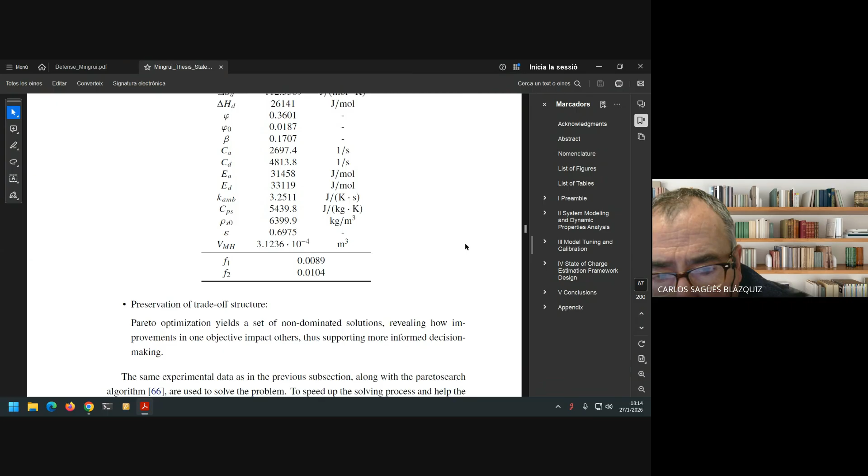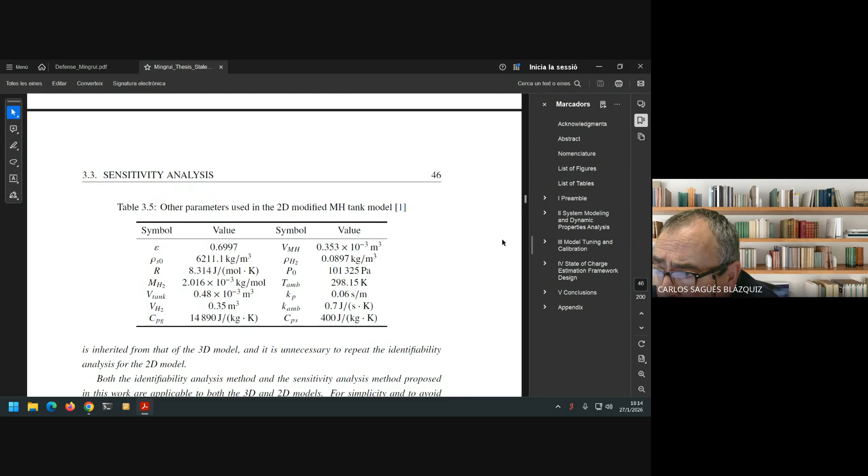Go, for example, to table 4.3, just because we don't have too much time. I don't understand why there are such different values. The specific heat of metal hydride in that table is 5,439, correct? Yes. Okay. Go to table 3.5. There you can see the value is 400. It changed from 5,000 to 400. Why?

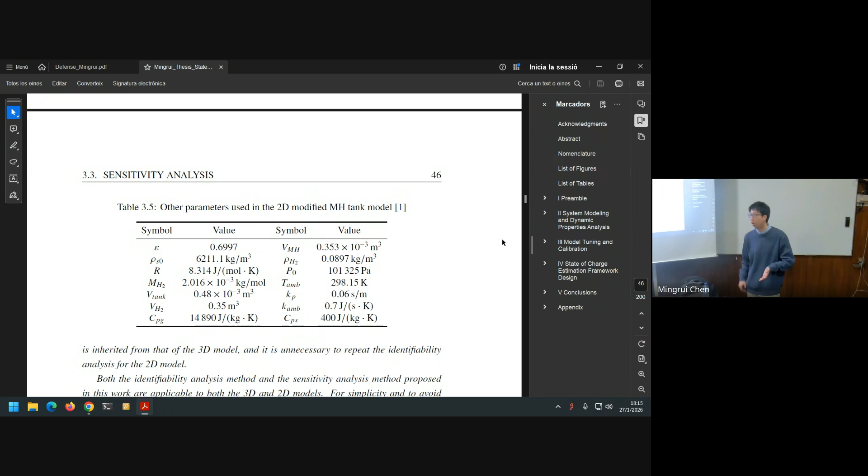The value there is 700. So it changed from 700 to 400 to 5,000. I couldn't understand why. There are several parameters which have the same... I think you have done a very important work just to experiment, but I couldn't understand why the values in several tables in chapters 2, 3, and 4 change so much. I don't know why.

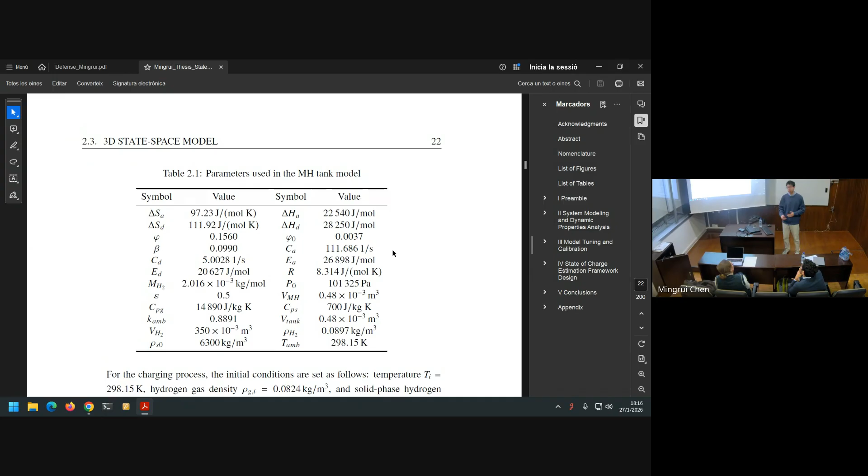Because this value in the reference paper, the material is different from ours. So if we want to analyze the sensitivity for our case, we should use experimental values.

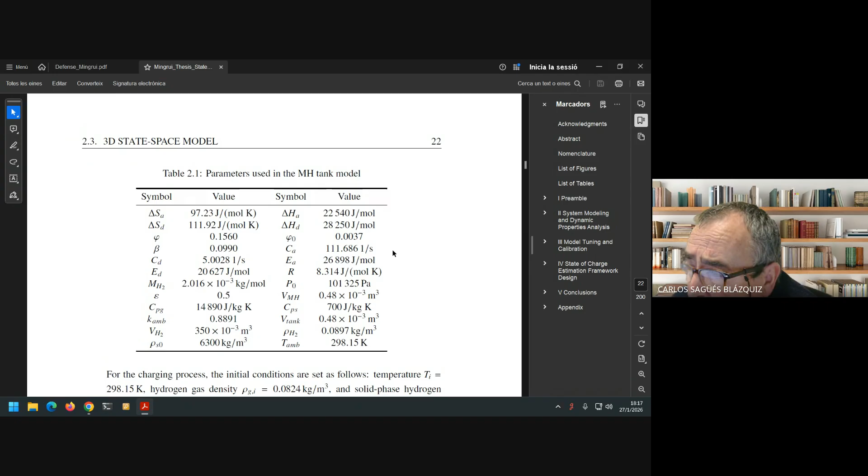Yeah, but as I said, I understand that you showed in one slide the experimental setup that you have been using, only one experimental setup. It's just a question. In my opinion, if you are using only one setup and you change the model, the values of the parameters used in both models should be the same — in the simple model, in the 2D model some parameters appear, and in the 3D model more parameters appear.

That's clear, but the value of the parameters that appear in both models should have the same value, shouldn't it?

In my opinion, the sensitivity analysis and identifiability analysis is local — it's a local problem because it's based on the Taylor expansion. So I think if we change the setup and use another model, we should re-analyze sensitivity and identifiability based on the complete thing. Okay, thank you for the reply.

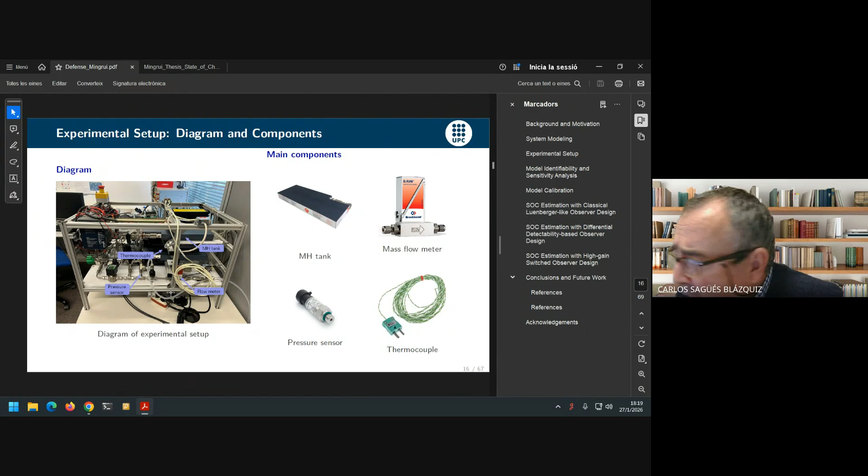I have also a question related to the observer — it's my last question. It also appears that in the tables in those chapters, table 5.1 and table 4.3, there are some parameters with different values, but that is not important for now. When you conclude about the observer, you have studied the classical Luenberger estimation based on differential detectability, and also the high gain observer.

When you conclude about these observers, it seems that all three work very well. If you read the conclusion of chapter 5, it says the proposed estimation framework related with Luenberger is validated through simulation and experiments, demonstrating fast and accurate estimation of the state of charge. If you go to chapter 6, it happens the same — the proposed method is successfully validated through simulation and works very well.

What is the conclusion then? In your opinion, for this kind of system, which method to estimate the state of charge is the best? What is your opinion about that?

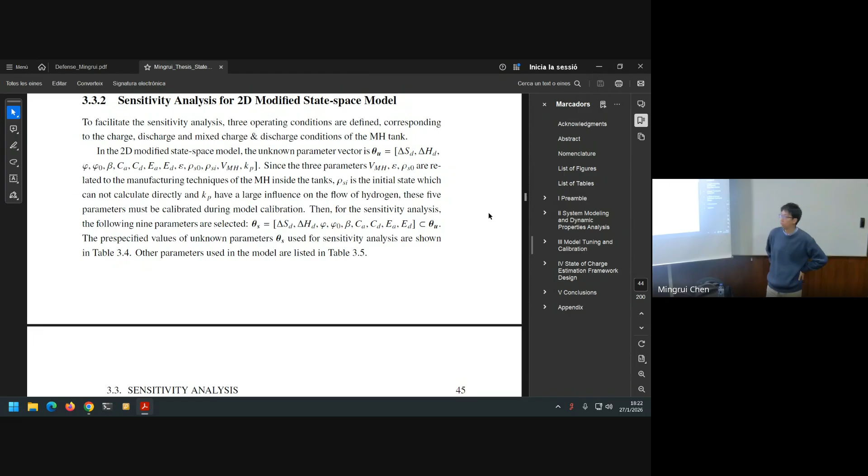But finally, what of the contributions of your work is the most relevant, which is the contribution that makes you feel most proud? What is the most interesting contribution, do you think?

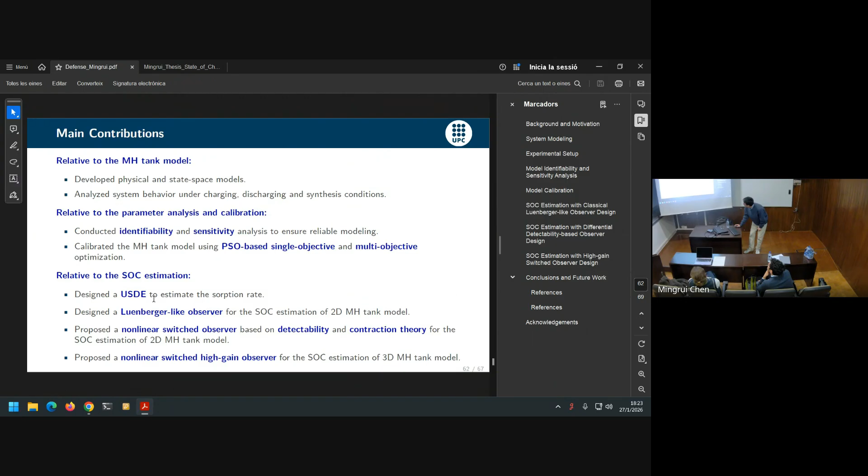Okay, that's perfect. Thank you very much, Mingrui. Maria and Samuel, do you have any additional questions? No, no, thank you, thanks.

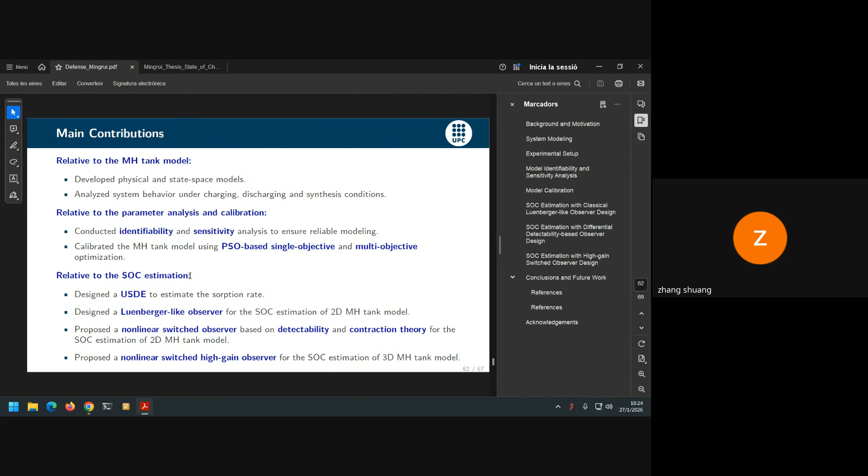Is there anyone in the room or in the meeting, any PhD who wants to ask Mingrui a question? No, I don't have any, as a co-supervisor. Thank you, Carlos. Okay, Zhang Shuang, are you a PhD? Do you want to ask a question? Is there someone in the room who wants to? Thank you, Carlos, I don't have any question. Okay, I think we have finished.

I would like to apologize to Mingrui and to the supervisor for not being there. You deserve, Mingrui, to be there, but I couldn't. I am very, very sorry because I couldn't be there. So my apologies to you and also to your supervisor.

If any PhD has any additional question... if not, we finish this act, and the jury will meet now just to discuss about the qualification. Congratulations to you and also to your supervisor. Thank you.